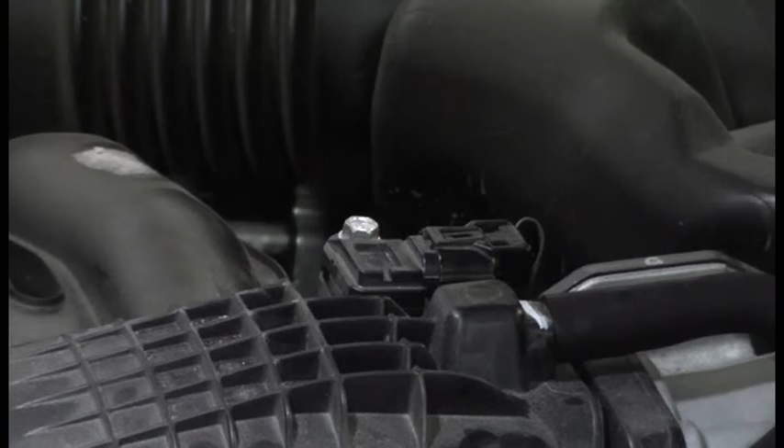If you are familiar with my channel, you pretty much know what's coming up here. If you are not, and you accidentally found me from one of those other major car repair channels, well, you're probably in the wrong place, but let's just go ahead and dispatch you guys right away.

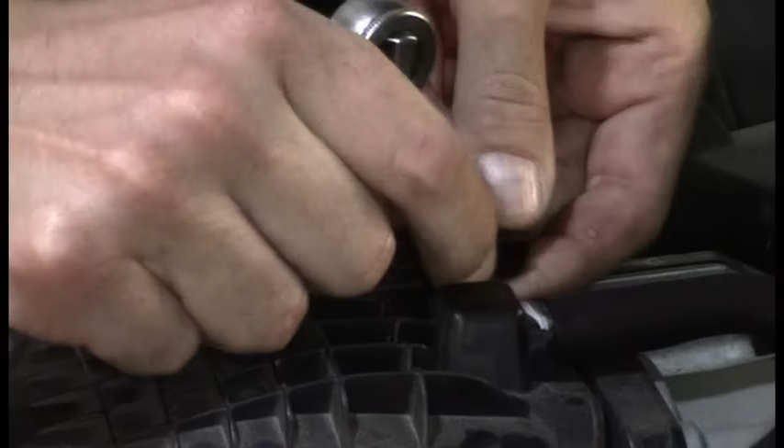For the 98% of people who probably get a MAP error code on their check engine light and think they need to replace their MAP sensor because they don't understand what the code is telling them, this is for you. Your MAP sensor is located somewhere on the upper intake manifold, generally connected by a tube. This one is actually direct, often held in by only one bolt. Wow, look, we're using a ratchet.

What a good day. Undo the electrical connector and remove your MAP sensor. To replace, you simply plug the MAP sensor in, reinstall it and the bolt, and tighten it back down, and you are good to go until the check engine light comes right back on.

All right, no need to thank me. I don't know how you would ever figure that out on your own without YouTube. So you guys are free to go now.

But for the 2% of you who want to know - how would you know exactly that you do have to change a MAP sensor? How can you diagnose that that is definitely your problem? And also, what is a MAP sensor? What does it do? And how can it maybe be used to help you with other diagnoses that aren't even related to the MAP sensor?

So for you guys, you know what's coming up. That's what we do on this channel. We don't just parts change - we understand exactly what the parts are, what they do, how to diagnose them, and even how to use them as part of diagnoses. So that's what we're going to do today.

All right, your MAP sensor, or manifold absolute pressure sensor, is one of the most misunderstood sensors probably in the car, and it won't be after this video. It's actually fairly simple, but boy, they sure love this thing in the chat rooms and on Yahoo Answers - everything from people who have no idea what they're talking about, but they'll tell you to check your MAP sensor. They wouldn't even know how to check it.

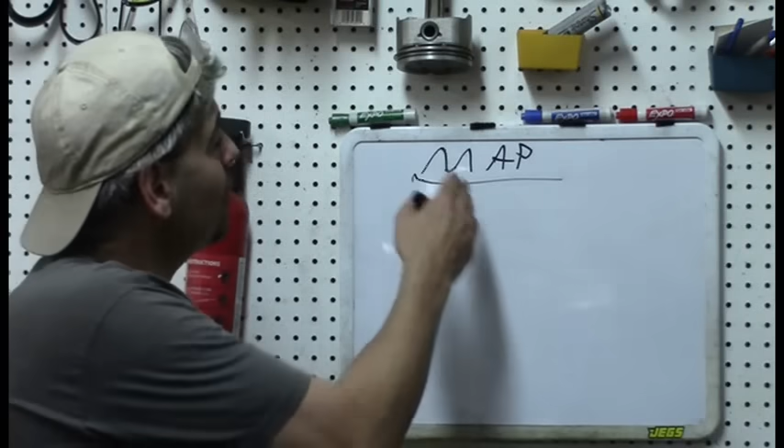What this is, is a sensor that basically detects changes in engine load. And the engine load is inferred by the changes in air pressure in the intake manifold. On a previous video, which I highly recommend you watch first - it's a video on the secret of engine diagnosis, fuel trims - the MAP sensor is mentioned briefly, but like with all other things, if you want to understand how a light switch works, you have to understand how electricity works to really understand the light switch.

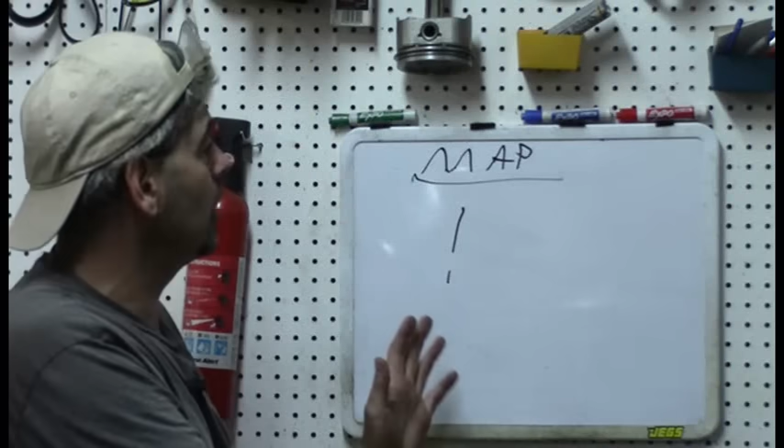And that's kind of the thing with the MAP sensor and any other automotive component. You can't really master just this component to get the big picture. You have to understand everything and how they all interconnect. So really understanding fuel regulation and fuel delivery is critical to understanding the MAP sensor. We'll kind of overlap a little bit, but it's a good idea to watch that first video before you look at some of the other videos I'll do on these other fuel monitoring sensors.

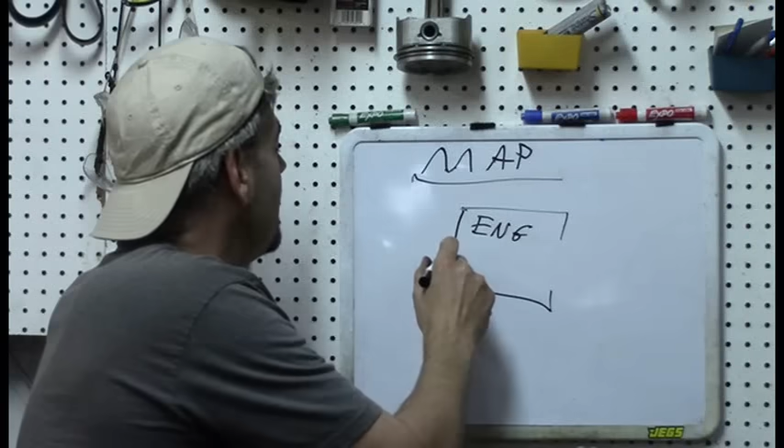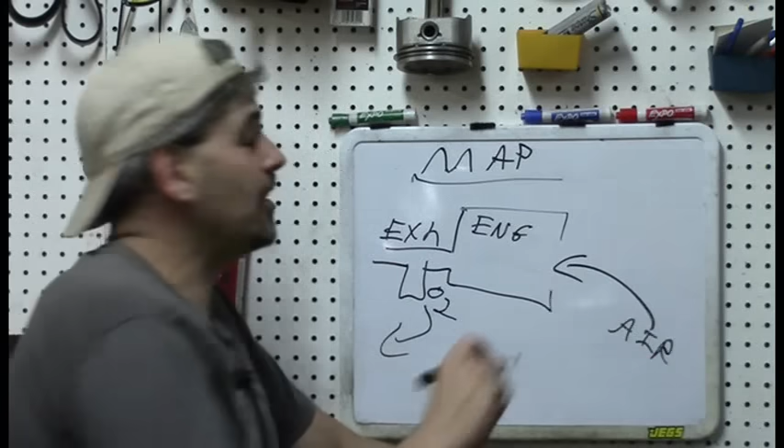But basically what we've got here is an engine, and here's going to be your exhaust. Generally an O2 sensor here, which we talked about quite a bit in the previous fuel trims video. And of course, you're going to have air coming in. The engine always has to do its best to maintain a stoichiometric ratio, or 14.7 parts air to 1 part fuel.

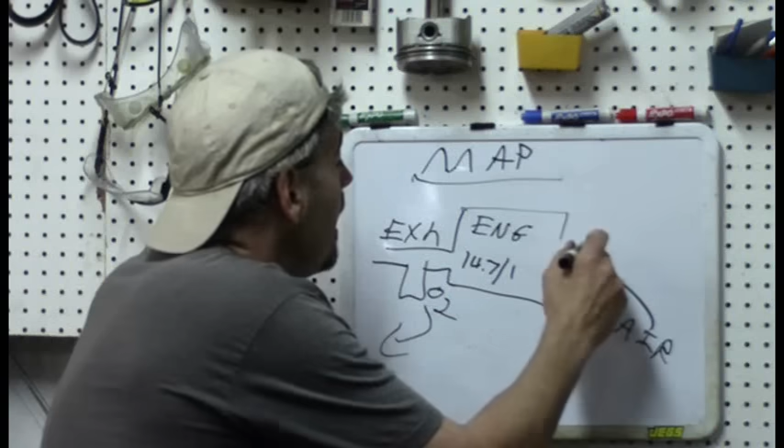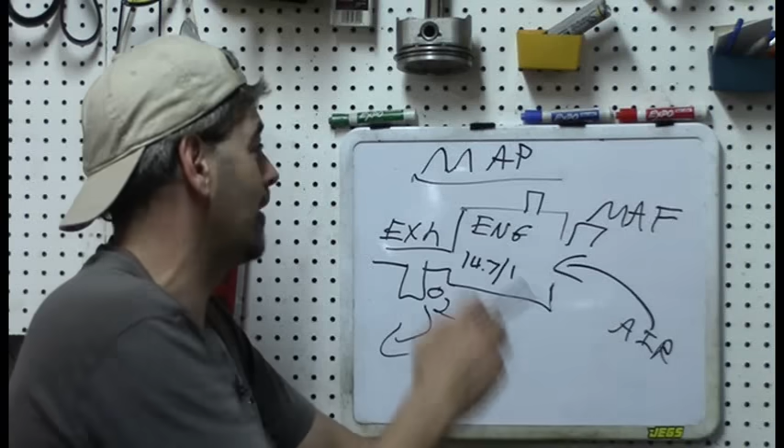Now, as mentioned in several other videos, there's a couple ways the engine does this. One of the main ways most engines will do this is with a device called a mass airflow sensor, or MAF. The other way the engine will do this is with a manifold air pressure, or absolute pressure - interchangeable terms. I was corrected one time for calling it a manifold air pressure sensor in the previous video by somebody who clearly does not understand what the sensor does. Thank you, asshat. But it is an air pressure sensor, and this will measure the air in the intake as well.

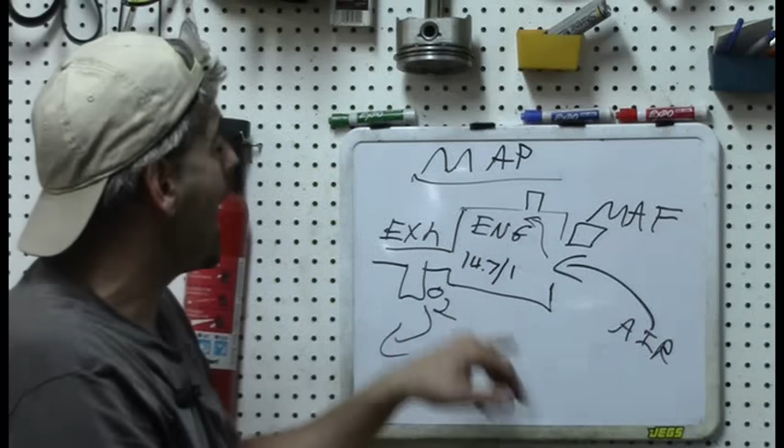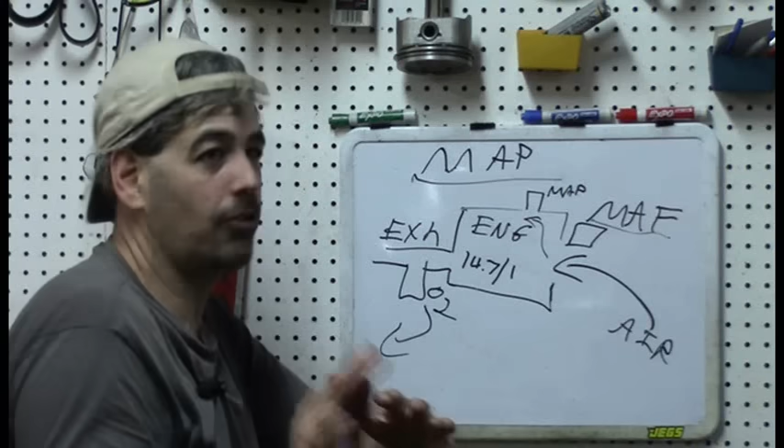It's very important to understand that some engines do not use a mass airflow sensor, and they will be dependent entirely on the MAP to maintain this stoichiometric ratio. Other engines will use the MAF as the primary source, but may also have a MAP that's used not so much for regulating air and fuel mix, but for other things like monitoring if the EGR valve is opening. If you're not familiar with the EGR valve, we'll talk about that in a future video. Basically, the MAP sensor detects predicted changes in air pressure in the manifold, which I'll explain, and it's not generally used for stoichiometric ratio maintenance.

Now, what's important to know in diagnosing a MAP sensor problem is whether your engine uses a mass airflow sensor or strictly uses the MAP. If the engine uses a mass airflow sensor, the MAP is generally inconsequential as far as engine performance problems go. Whereas if your engine is strictly run off a MAP sensor, then a MAP sensor problem would very much affect your engine performance. So that's the first thing you need to determine.

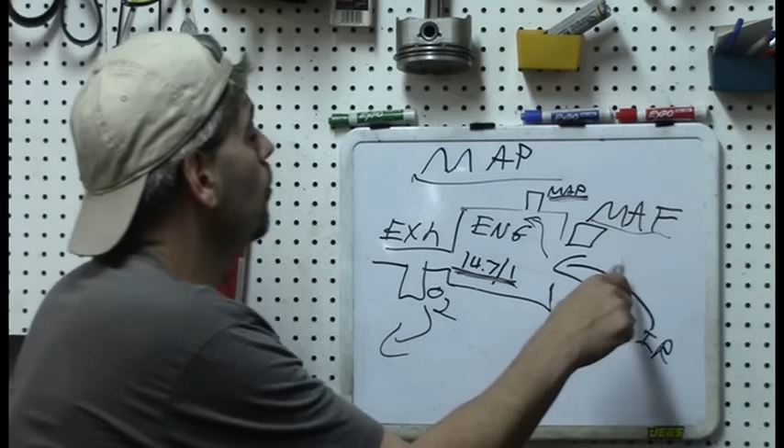So let's take a closer look specifically at how the MAP sensor works and responds to the perceived engine load based on air pressure.

All right, so in our engine we've got our throttle right here. Yes, if you're not familiar with my amazing artistic abilities, try not to be too impressed and just pay attention to the concepts. But obviously, the throttle is going to control the amount of air coming in.

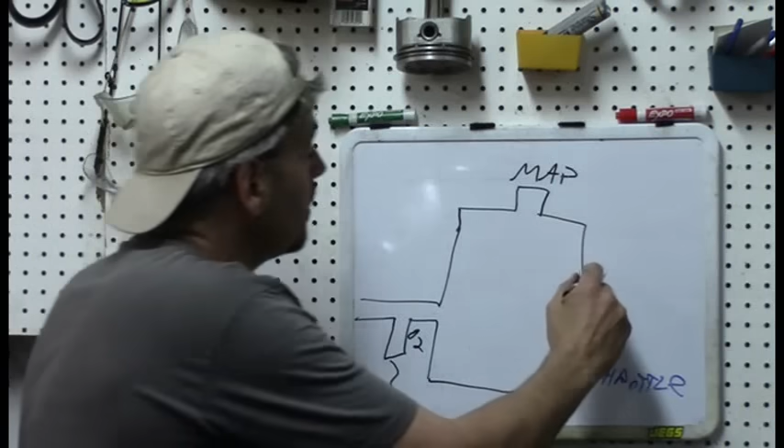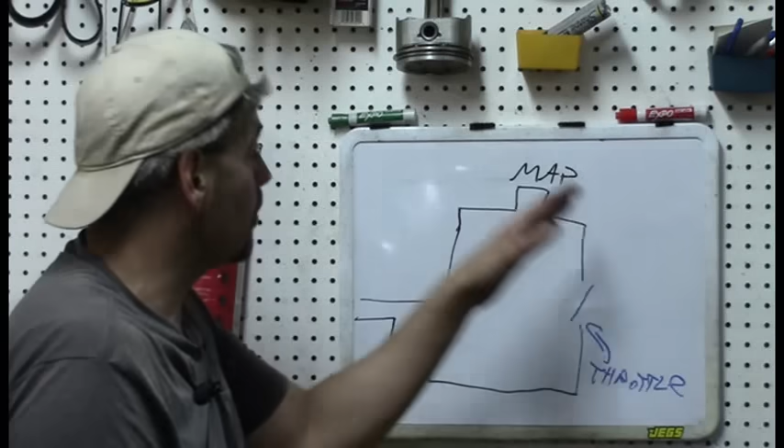Normally, prior to the throttle, you would have your mass airflow sensor, which detects the amount of air coming in just before the throttle. We are not going to focus on the mass airflow sensor today, so we'll just assume the engine is run only on the MAP sensor. We won't worry about the MAF right now. Also be advised that in the event of a failure of the mass airflow sensor, the MAP on a lot of engines will also act as a backup and replace the mass airflow sensor as the main monitoring if it has some type of failure or electrical problem.

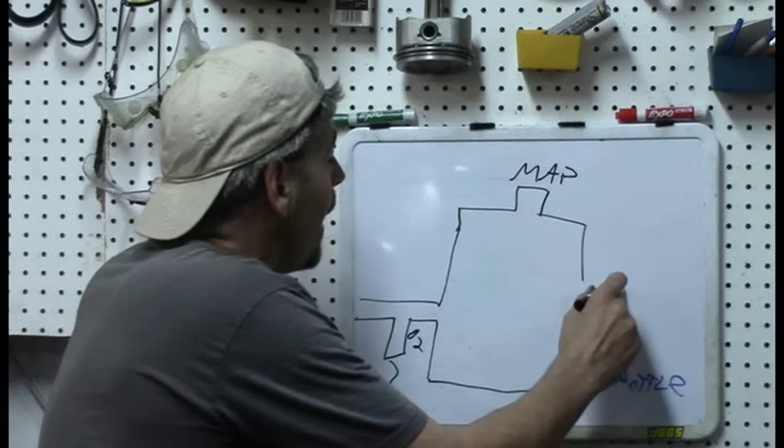So as the air comes into the engine, the air is going to increase pressure inside the intake manifold. When the engine is at idle, hopefully you know that's when you're going to be at the highest vacuum, so you're going to have a very low air pressure inside the manifold at idle. Okay, let's put idle here.

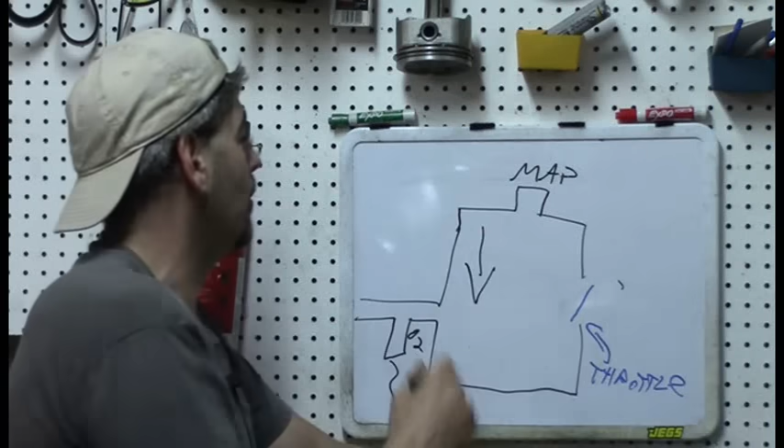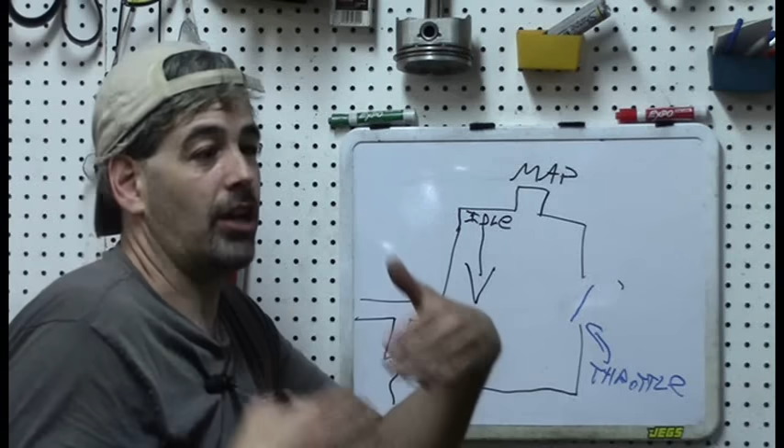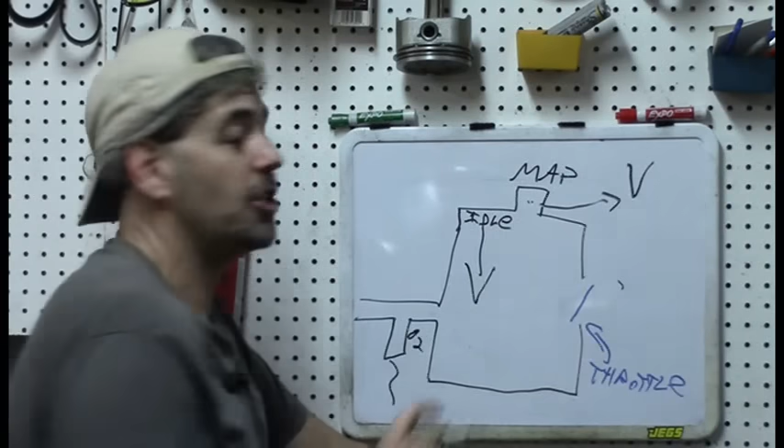And of course, it's not going to be the highest possible vacuum you can get. Your highest vacuum is actually going to be on an engine deceleration. But basically, if you are decelerating or at idle, the engine is under fairly low load, and that's going to be detected by the MAP sensor because of the low pressure in there. The MAP sensor is going to emit a voltage that is in proportion to the air pressure in the intake manifold.

Basically, at high pressure, that's going to be at high load. That means there's lots of air in the engine, or in other words, the throttle is fully open. You're going to have probably closer to, on most cars, 5 volts in a high load event where there's much more air coming in. Based on that voltage, the MAP sensor feeds this information to the computer. The computer knows how much air would be in the engine, so it knows how much fuel to add to maintain that 14.7 to 1 stoichiometric ratio.

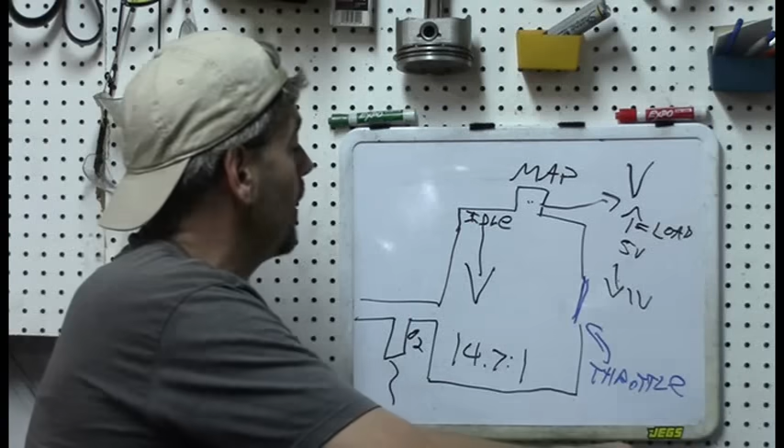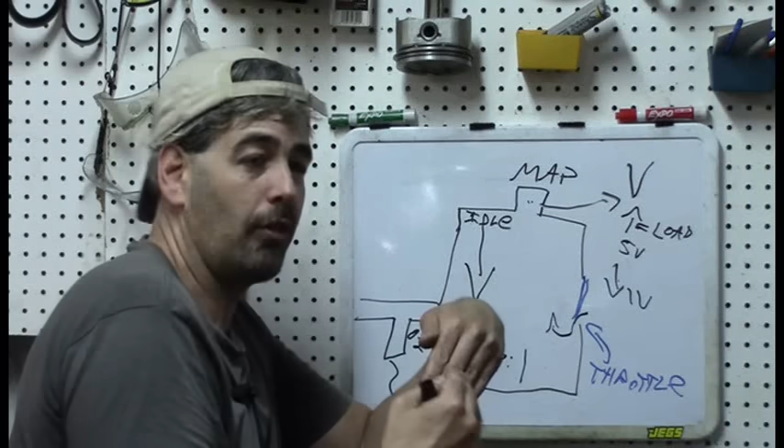Now, in this event, at idle, we're going to have a very low load, so we're going to be closer to maybe 1 volt or even lower. At idle, the throttle is going to be pretty much closed with a very minimum of air coming in, so high vacuum, and therefore the MAP sensor is going to tell the computer to reduce the fuel injector pulse length to accommodate for the lower engine load. You don't need as much fuel.

So again, higher engine load would be the result of the throttle being open, more air coming in, more fuel is needed to maintain the 14.7 to 1 ratio, resulting in higher injector pulse length. And then at idle or on decel, you're going to have much lower MAP sensor voltage because there is much less air pressure in there.

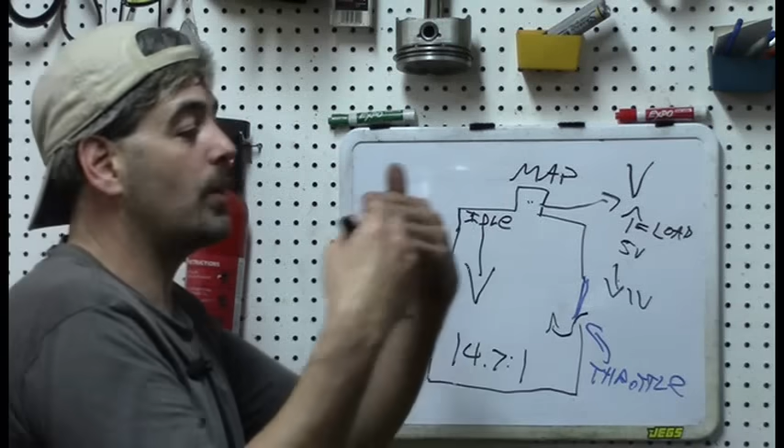The lower voltage signals to the PCM to reduce injector pulse length to compensate for the fact that there is less air, and therefore we need less fuel to maintain that stoichiometry.

A lot of people mistakenly think that the oxygen sensor determines the stoichiometry, and as we know from that previous fuel trim video, that is incorrect. The oxygen sensor simply trims these values if there are errors from the MAP sensor.

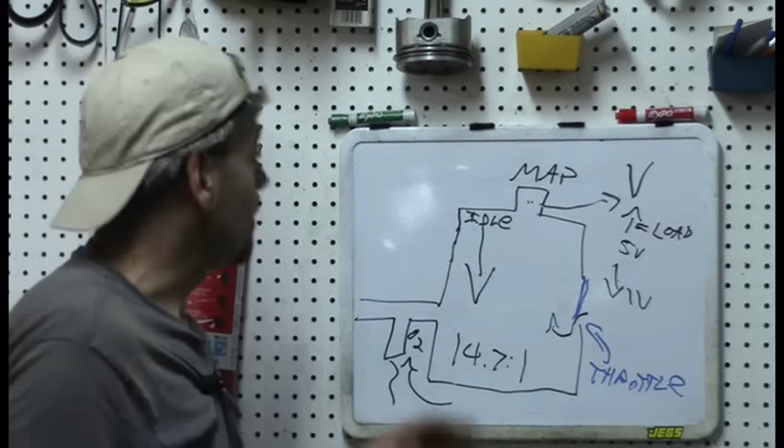So let's talk real quick about specifically how the MAP sensor works, and then we'll talk about some MAP sensor problems that you may get that actually are not even the fault of the map sensor. It's what I call a referenced code. So let's go ahead and look at that real quick.

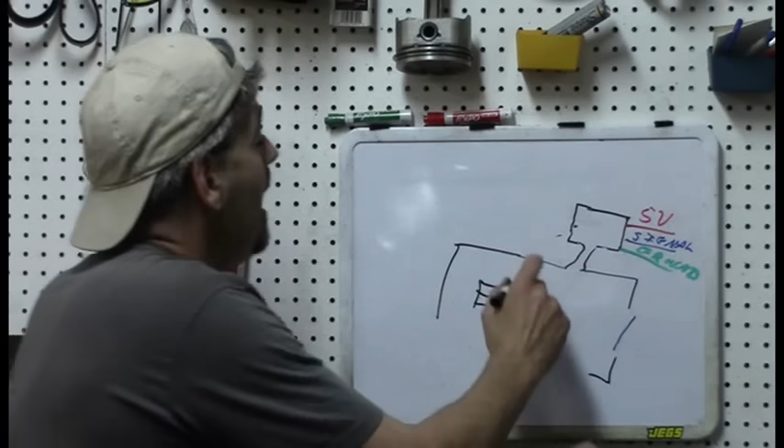All right, so this will be your engine, your intake manifold specifically. And then of course you've got some air coming in through the throttle, and that air is eventually going to work its way up to your pressure sensor here. So in the pressure sensor, there's going to be a diaphragm in there.

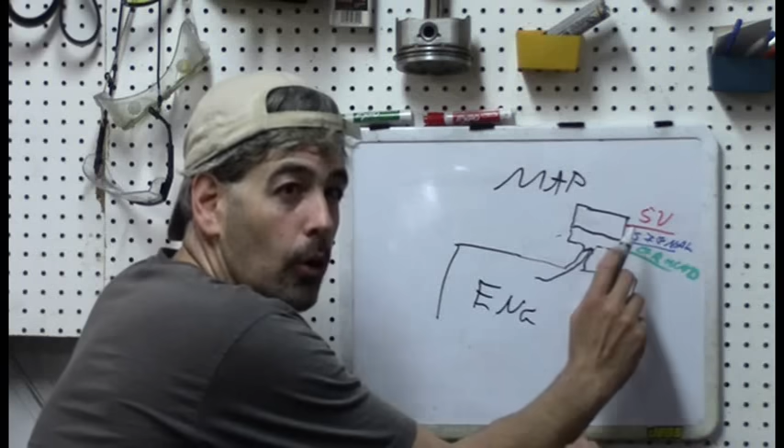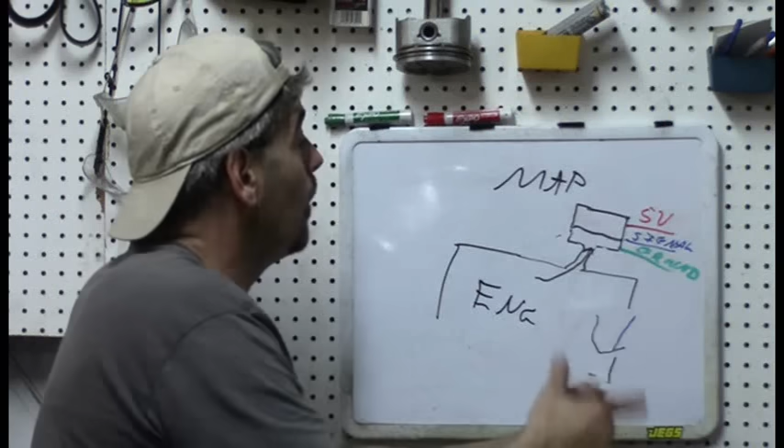And there's going to be generally in most cars, 3 wires connected to your MAP sensor. It will also be the case on the car we're going to actually play with and apply these concepts to near the end of the video. You're going to have a 5-volt reference signal coming into the MAP. Of course, there'll be a ground. And then there's also going to be a signal, which is going to be the MAP signal to the PCM to help determine your fuel delivery to match the perceived air in the intake manifold to maintain that stoichiometric ratio.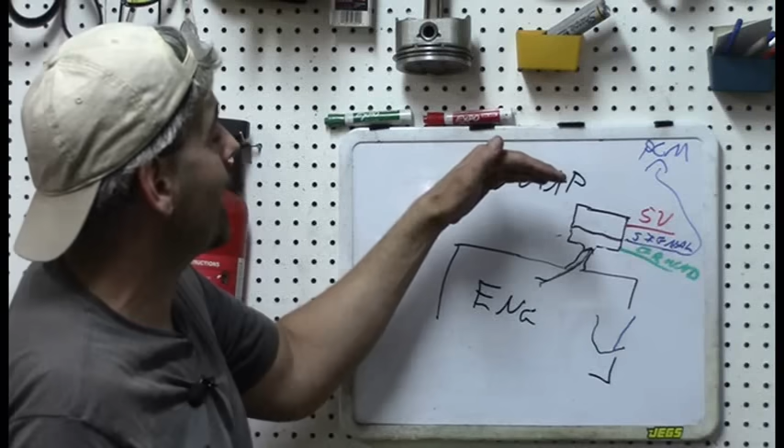So as the air comes in there, it's going to push on this diaphragm. And the more that it pushes on the diaphragm, then the higher voltage that is going to go through the signal. So if there's a lot of air, full open throttle, then basically you're going to get pretty much 5 volts running through your signal wire.

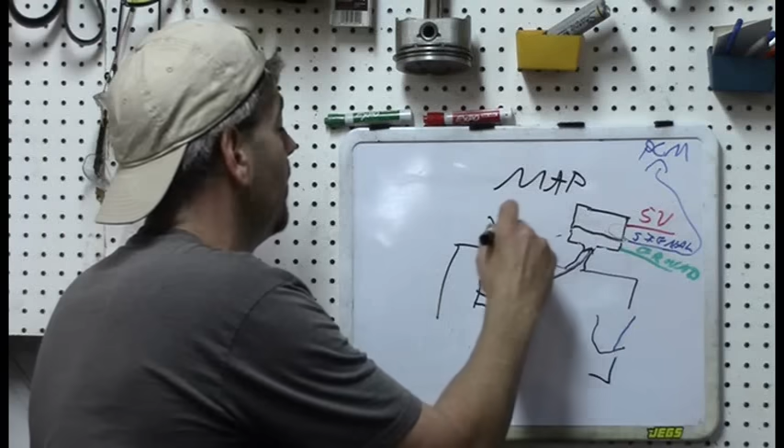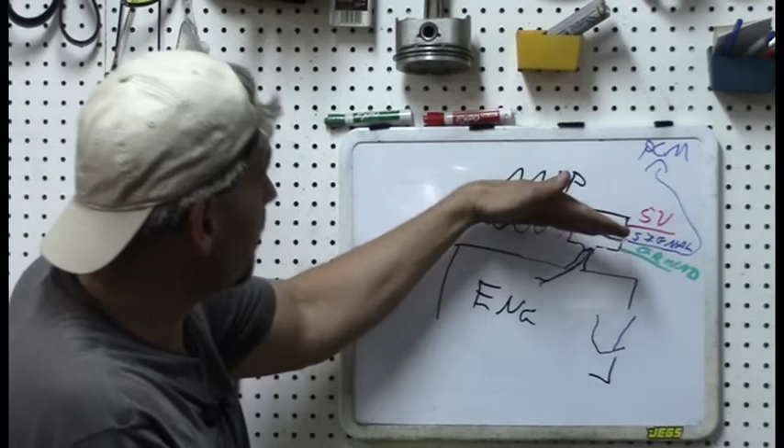It's actually, for all practical purposes, a variable resistor, as I've shown in some other videos, like the intake air temperature sensor, for example, is a video that explains this. So basically, the position of this diaphragm is going to change the voltage to the PCM.

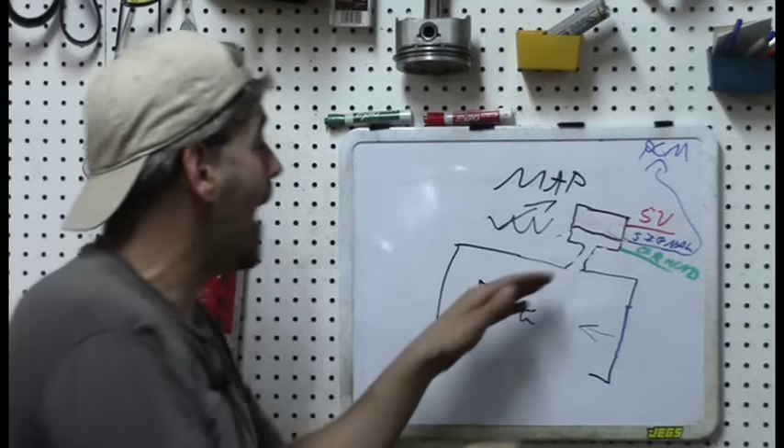The opposite is going to be true if there is very low amount of air in the engine because this throttle plate is very closed. You're going to have a pretty strong vacuum in the engine, and that vacuum is going to really pull down on this diaphragm, reducing the voltage to the PCM and reducing the fuel delivery.

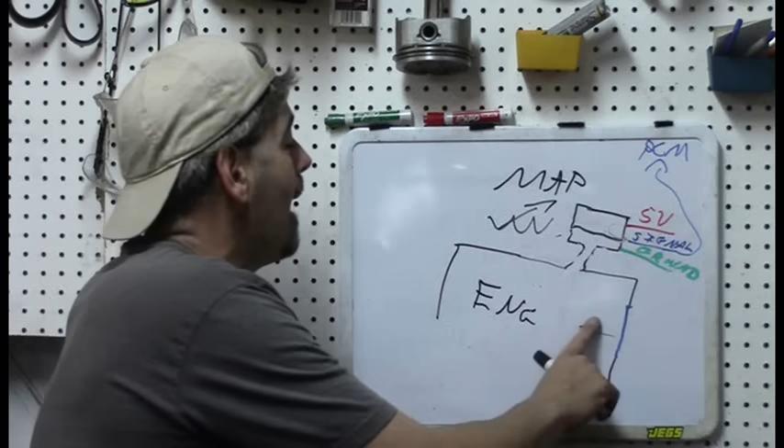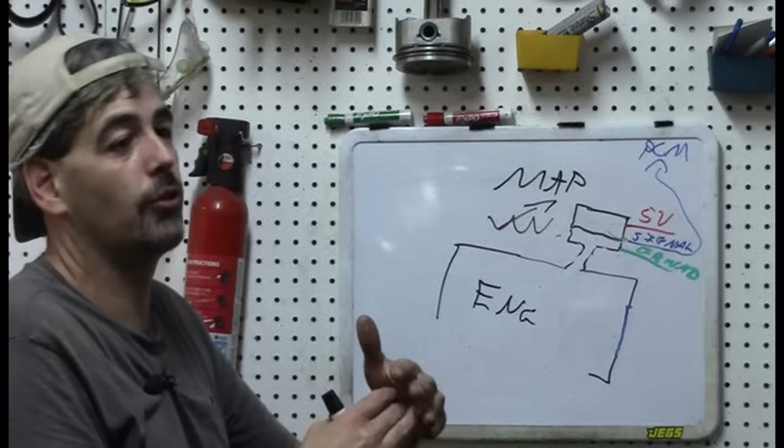In the event of a decel, where you have very strong vacuum, very low air pressure in the intake manifold, then it's going to just about cut off fuel delivery, because on a decel you need very, very minimal fuel delivery. The engine is under almost no load. So the variable voltage is what actually controls that fuel delivery.

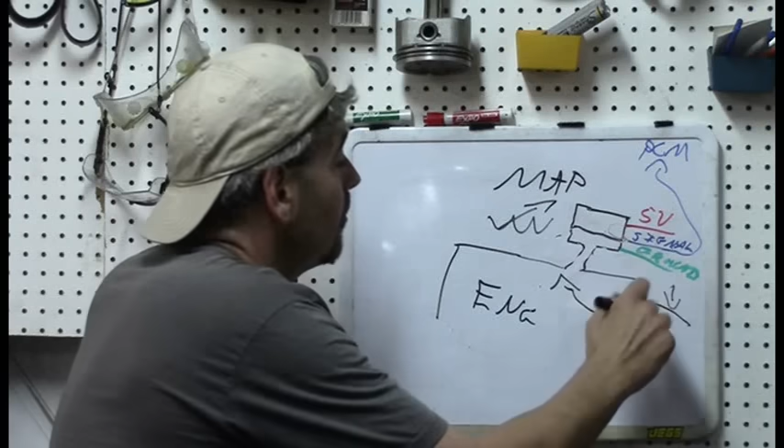Now, there is one kind of cool advantage of a MAP sensor, and that is, if you saw the previous video with a mass airflow sensor, one of the disadvantages with a mass airflow sensor is, of course, the whole idea is to measure the air in the intake manifold, but the mass airflow sensor measures air before it even enters through the throttle. So the problem is, if you have something like an intake manifold leak where air is getting into the intake manifold, well, on a MAF engine, that is not going to be compensated for.

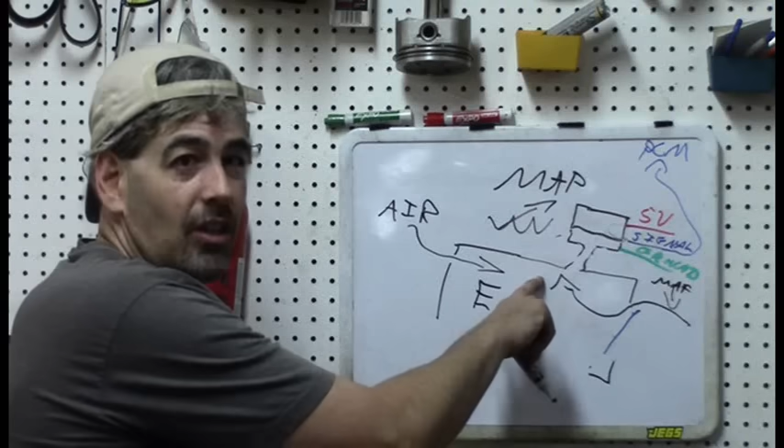But a MAP, because the map is directly connected to the intake manifold, actually does count and compensate for that air from a vacuum leak. So it's kind of an advantage in that you'll have less of a performance issue.

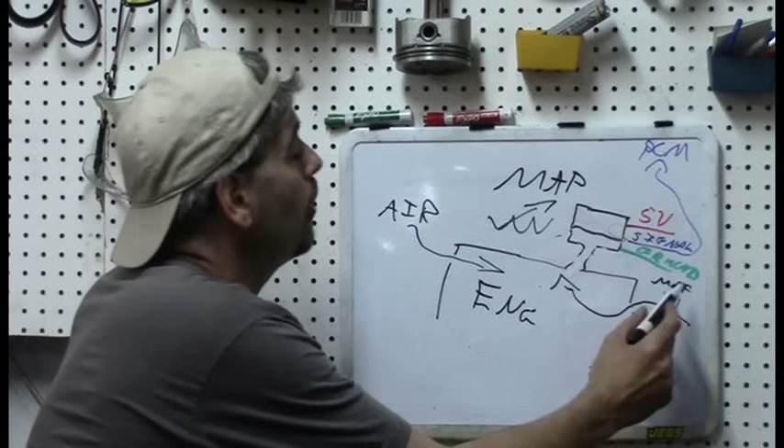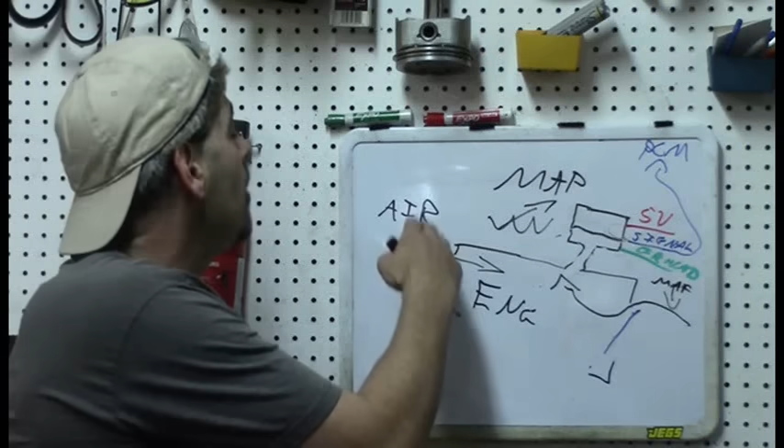Of course, most MAF engines also have a map that would help to adjust for this. And of course, we know the oxygen sensor is ultimately going to adjust for air intake leak or any kind of vacuum leak, because we would get a lean exhaust from any air that comes in that is not accounted for in the 14.7:1 stoichiometric calculation from the input sensors. And again, all of this is explained in that previous video, so I'm kind of brushing over it real quick.

All right, now if you're anything like me, and my condolences if you are, you learn not only through the brain work and everything, because really all diagnosis is done with your brain, not with a wrench. But the first thing is I really want to make sure that these concepts that I showed, which admittedly can be kind of confusing, are solidly understood.

So to do that, let's head over to the car and plug in a scan tool and look at the reaction of the map sensor based on different inputs we give it. It'll help us get a solid understanding of these concepts, so that when we move on to diagnosing a map sensor, or using it to diagnose another part, it'll all make sense. Let's go over to the car and see what happens.

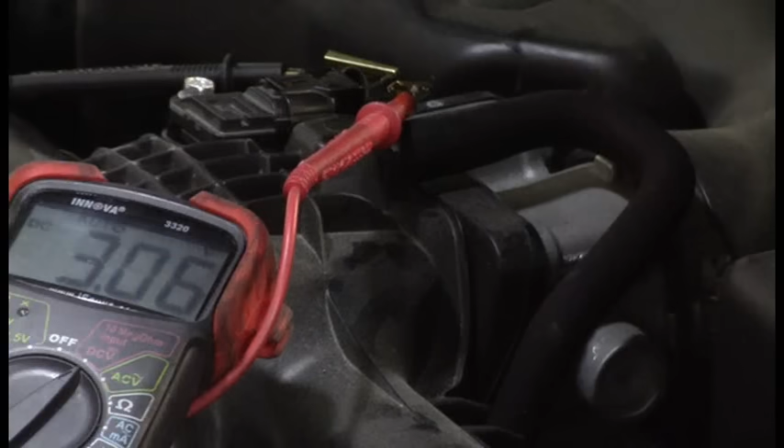All right, so I lied. We're actually going to do voltage measurement first, mainly because I know a lot of people don't have scan tools, so they want to see how to do the voltage measurement. And it'll also validate what I've shown earlier.

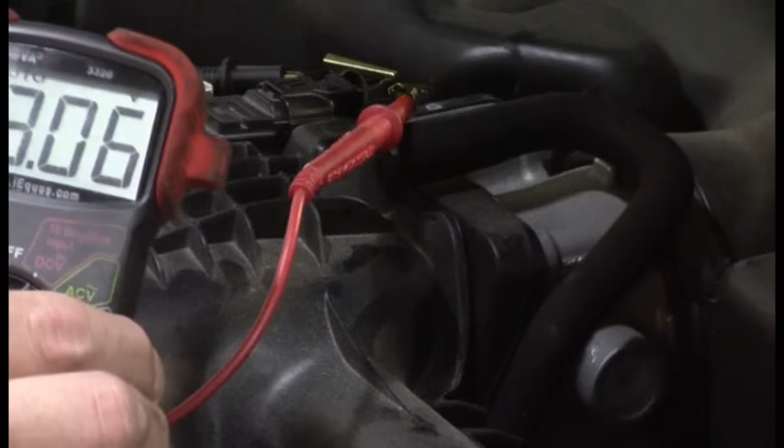What I'm doing is back probing very carefully between the ground and the signal wire to get a voltage measurement, not the 5-volt reference wire, because that would read 5 volts all the time. I want to get the signal wire voltage so we can look at the variances in voltage. We can see here that we've got about 3 volts.

This would be due to just the barometric pressure, since the engine is off right now. As you know, if you've got a scan tool, a lot of times you'll have a barometric pressure reading, and that reading is indeed from the sensor and interpreted from the voltage.

What we're going to do is sort of predict what is going to happen based on various inputs, based on what I explained earlier on the dry erase board of knowledge. So what I'm going to do now is start the car.

Now, when I start the car, what would you expect to happen to this voltage between the ground and the signal wire? If you guess that the voltage is going to drop, you are correct. We should see the voltage drop. I don't know exactly how much, I'll anticipate it'll go around maybe a little over a volt, but we expect the voltage to drop because at idle we're going to have high vacuum.

Okay, and we can see that we do indeed have a drop. Now, let's think about this.

What's going to happen if I snap the throttle open and closed really quick? I'll give you a second to think about that. Remember, we're going to snap the throttle wide open and then let it close really quick. What would we expect to see on the voltmeter?

What I'm expecting to see is the voltage go back up to just a little over 3 volts on the wide open throttle. But then when I snap it closed, because we'll be in a decel condition, we should see the voltage lower than what it is now, lower than about 1.5, because we'll have even higher vacuum than at idle. So let's go ahead and see if that's what happens.

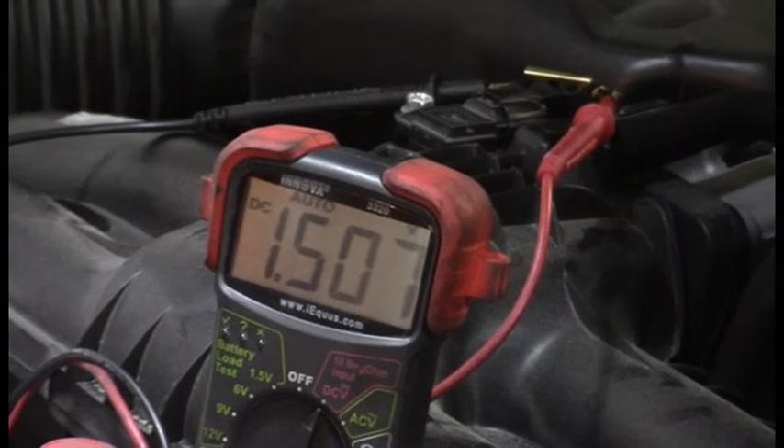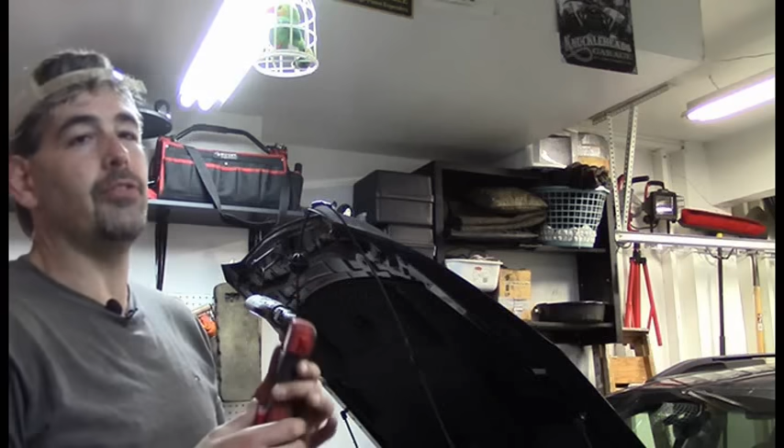See, it all makes sense now, doesn't it? And incidentally, for you experts, one of the things you might have noticed at the beginning when I first started the car, the map voltage was around a little over 1.6, maybe almost 1.7, but then it started to decrease and went down just a little bit below 1.5. Why would that be? Why didn't it stay constant?

Many of you guys probably know correctly - we don't guess much on this channel. It's because with the cold engine start, the idle air control motor is open much more to allow the faster idle. The idea is the engine computer is allowing more air into the engine at startup to allow a faster idle and quicker warm up. But as the engine starts warming up, it starts closing off that throttle, meaning less air coming in, more vacuum, and therefore decreasing the map sensor reading over time. So that's why you saw that phenomenon.

So let's go ahead and do this as long as we're here. Let me hook up the scan tool, and we're just going to reproduce the voltage measurements - I wanted to show them for people who don't have a scan tool. We're going to do some things involving removing the map sensor and experimenting a little bit, and I don't want to do the voltage measurements with that because there's too much chance of crossing my leads up.